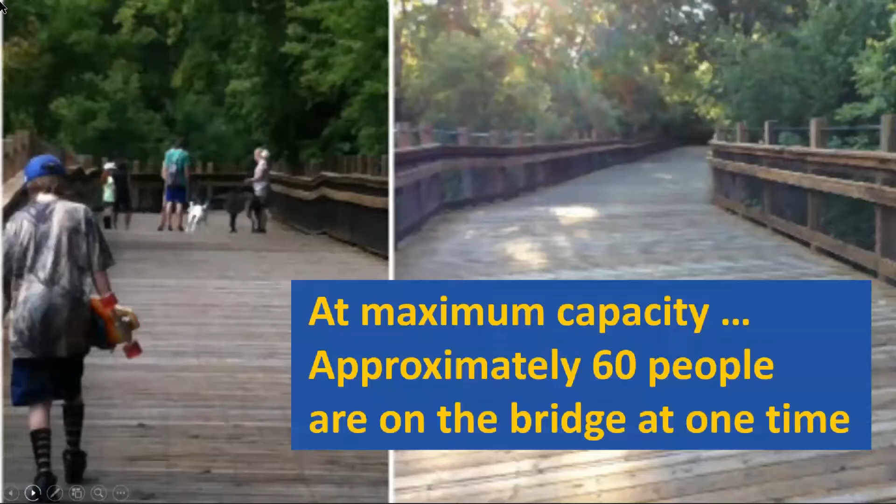Every Halloween, this haunted adventure brings hundreds of people to the bridge. Although walkers traverse the bridge daily, the maximum capacity is during the Trail of Terror, when approximately 60 people are on the bridge at one time.

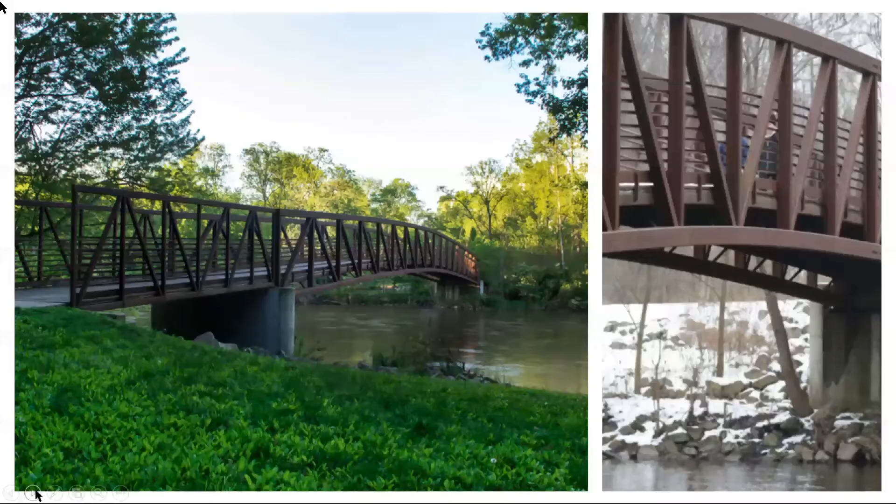This scenic bridge is composed of a variety of materials from the steel sides and supports to the wood decking and concrete pillars. We measured them all, but had to make several assumptions to complete the analysis. We assumed a uniform distribution of weight across the span of the bridge and simplified the cross-section. Calculations used average weights and publicly available data on construction materials. We utilized a simple free body diagram to represent just the middle portion of the bridge between the concrete pillars as a simply supported beam.

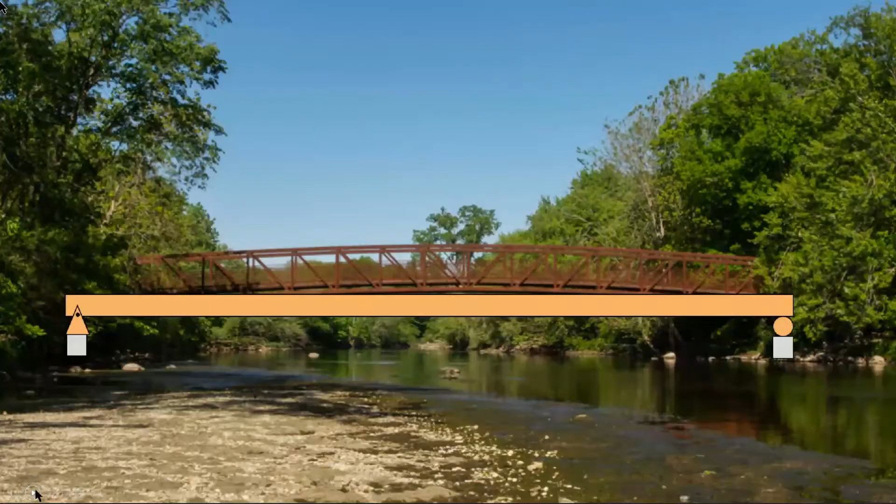Identifying the materials, we researched their typical weights and converted them to the appropriate SI units. Pressure-treated deck boards have a weight of 4 kilograms per cubic meter, and square tube steel has a weight of 3.37 kilograms per linear meter for 1x1s and 9.68 kilograms per linear meter for 4x4s.

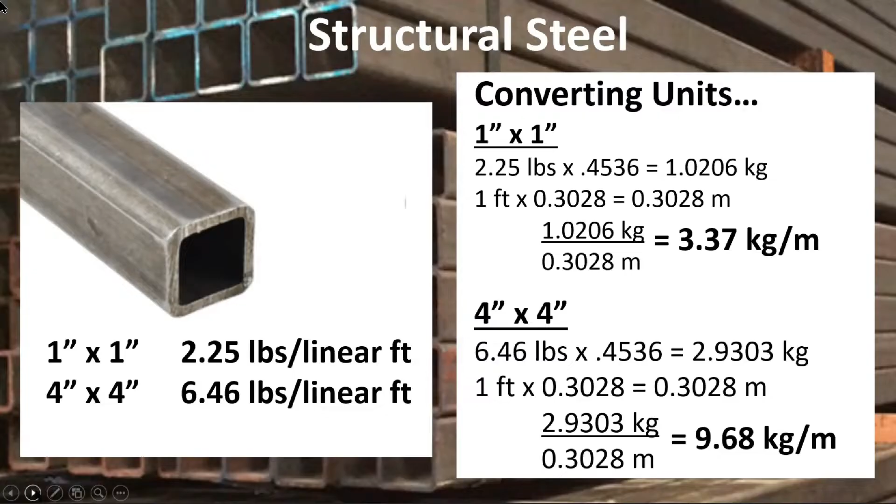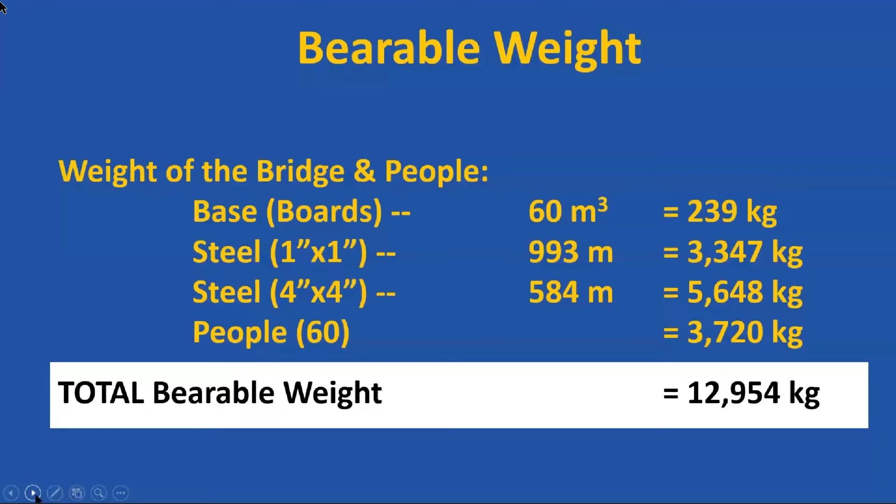Because a variety of people and pets use the bridge daily, we used the accepted average weight of a person, which is 62 kilograms. Aggregating the amounts of materials and people loading the bridge, we arrived at a total bearable weight for the bridge. This load was assumed to be distributed evenly across the bridge's length of 55.2 meters. For the analysis, we converted this to a point load and applied the statics equations of equilibrium.

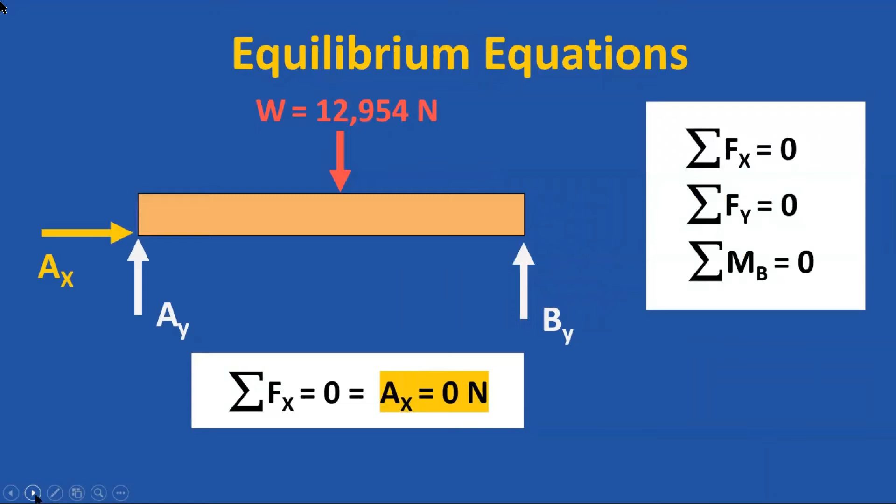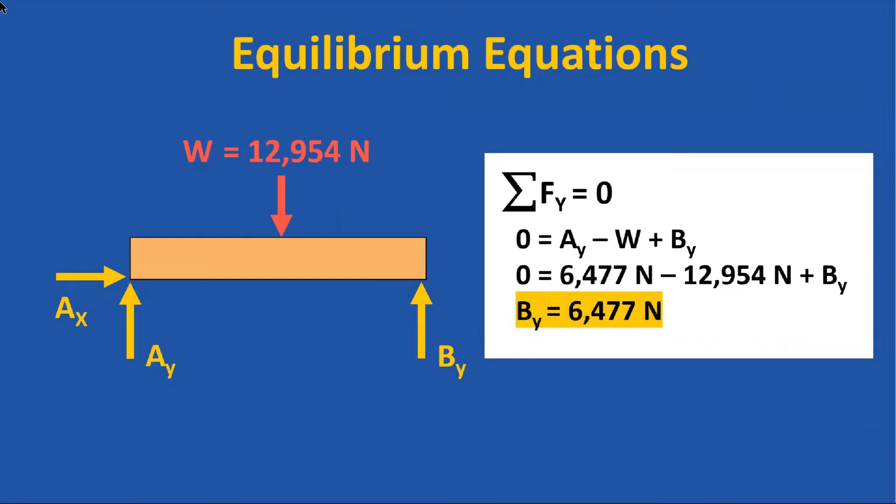Starting with the sum of the forces in the x direction, which yields 0 newtons for force A sub x, summing the moments about point B gave us A sub y, and summing the forces in the y direction gave us B sub y, but the static analysis was insufficient. We had to find the shear force, V, and the moment, M, at any point along the span. So we made a cut at various points and found the shear force and the bending moment at each cut.

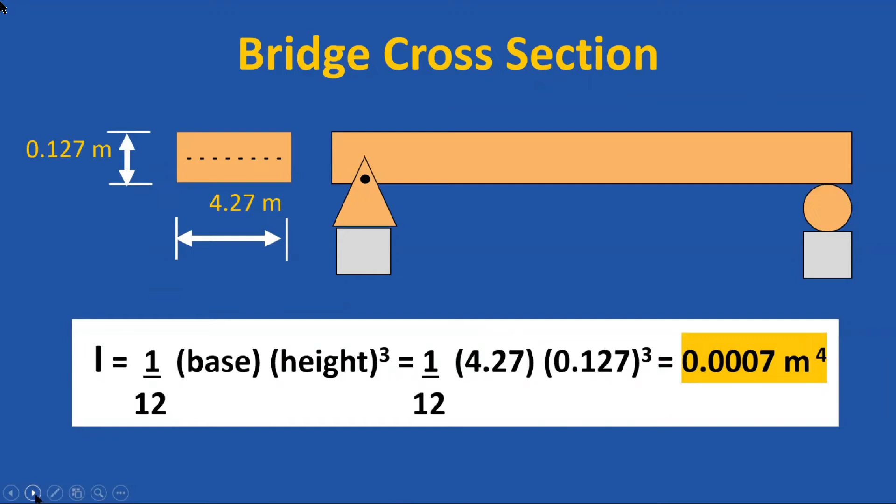Next, we needed to define the cross-sectional area of the bridge deck in order to determine I, the second area moment of inertia, for our stress calculations. In this case, the axis runs parallel to the bridge deck length, so the height of the cross-section is cubed. We calculated the shear force and bending moment at various points on the bridge. There were 3 critical points on the bridge, near each end and at the center.

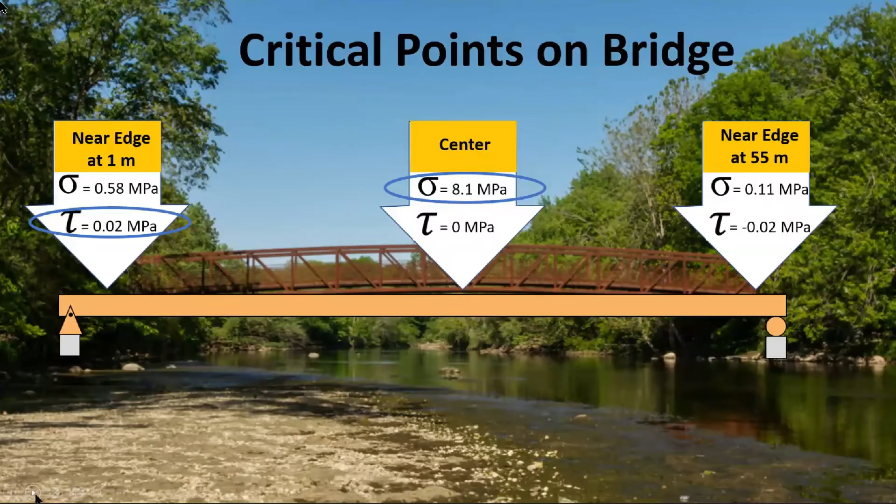The maximum normal stress was found at the center and shear at the edge. The maximum normal stress was found to be 8.1 megapascals, and the maximum shear stress was 0.02 megapascals. Normally accepted ultimate strength values for tensile and shear for the pressure-treated boards used in the bridge deck are 33 and 6 megapascals respectively. Comparing this to our stress results in a factor of safety of 4, making our bridge very safe.

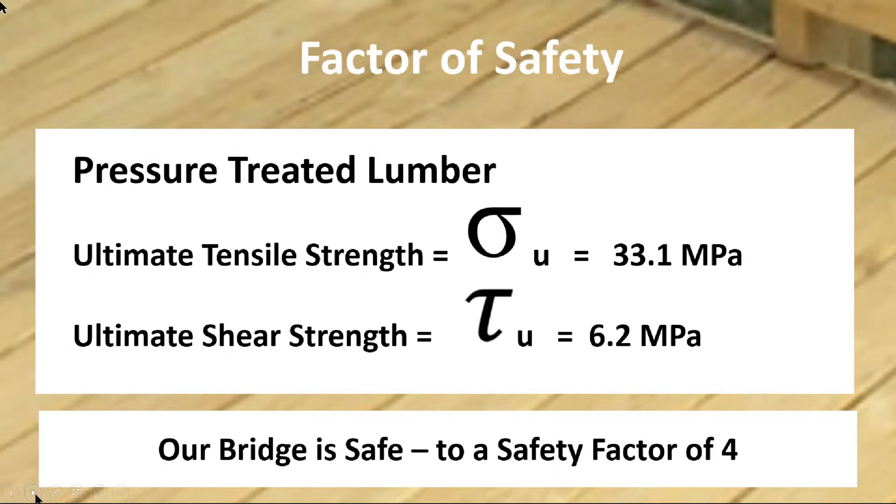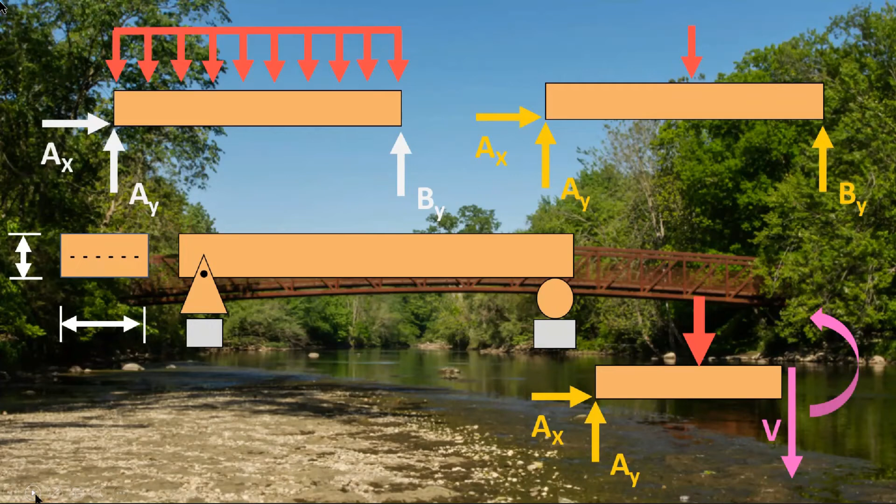During our project, we analyzed the strength of the Riverview Trail Bridge in Flushing, Michigan, using both statics and solids concepts, including distributed and point loading. We calculated and plotted maximum normal and shear stresses in the cross-section at critical points along the bridge's span, and analyzed the bridge in comparison to accepted standards for its material. We calculated maximum stress at the center of the bridge's length and found this bridge to be very safe. In the end, this analysis was all about safety.

But we couldn't finish this project without one last suppose. Suppose we decided to drive a school bus across the Riverview Trail Bridge. Sure, the bridge wasn't made for buses, but it would fit and makes for an interesting new extreme condition. A fully loaded bus weighs over 11,000 kilograms, including students.

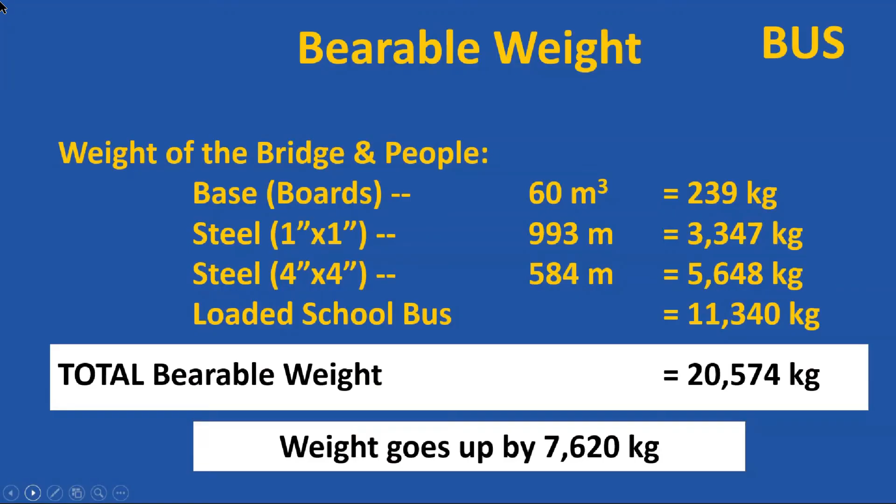This increases the people load threefold, and the total bearable weight by almost 8,000 kilograms, making the maximum normal stress now 12.9 megapascals, and reducing the factor of safety to 2.6. The bridge is still safe, but this is not recommended.

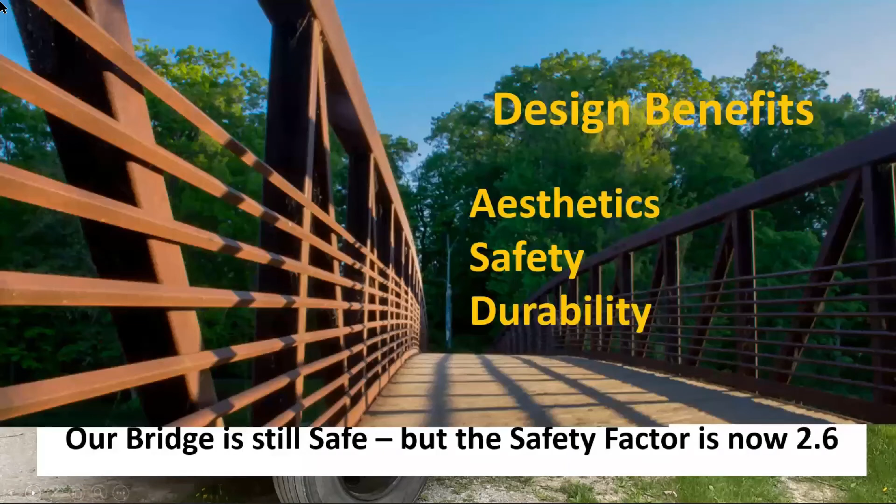The Riverview Trail Bridge is one of the hidden treasures of Flushing. It was designed with the community in mind and has many benefits that add beauty to the Riverview Trail. The materials used blend in with its natural setting. The bridge is strong and safe, and now renovated will last for another 20 years through all kinds of weather and special events. The community can connect to both wildlife and nature through a simple walk across this bridge, from downtown to the park.